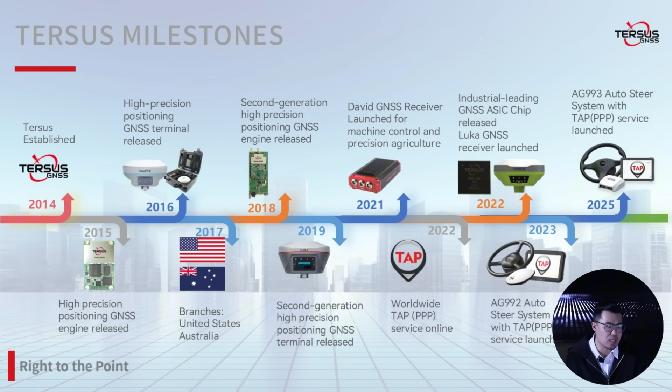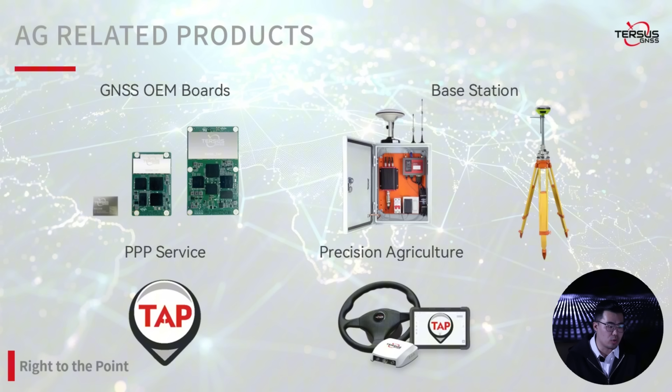Since Tersus was established, we have been focusing on GNSS boards, receivers, and navigation algorithms. This technology foundation is what makes long-term stable auto steering possible. And these are our products related to agriculture: our own GNSS board, base stations, and our PPP service TAP.

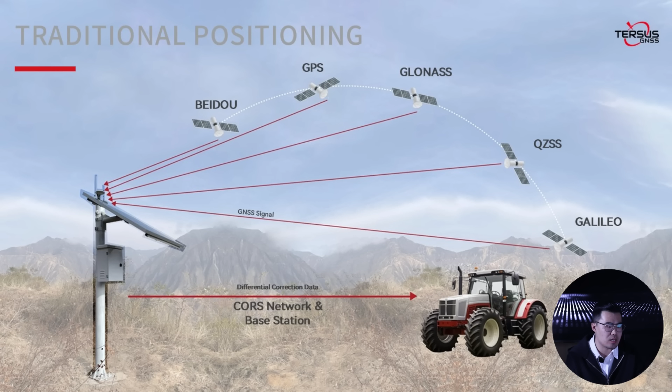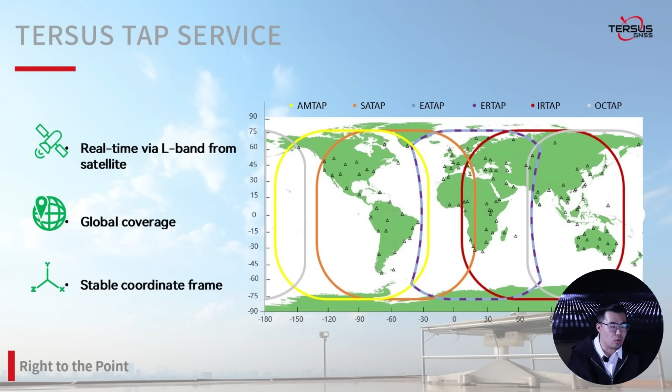Okay, the AG993 system is powered by the Tersus TAP, a global PPP correction service. Unlike the traditional RTK solution, the TAP doesn't require a local base station or complex configurations. It offers global coverage, fast convergence, and 24/7 availability, which makes deployment much simpler, especially for distributors operating in multiple regions.

Another important point is reliability. When RTK signals become unstable and unreliable, the system can seamlessly switch to the TAP mode as a backup, ensuring continuous operation in challenging environments. That is the TAP fill function.

Compared with the B2B of BDS and the HAS of Galileo, TAP has absolute advantages in coverage, convergence time, and accuracy. Now let's move on to the AG993 Auto Steering System itself.

AG993 adopts an integrated receiver design with built-in GNSS IMU module and network and radio modules. This means the system can directly connect to the L-band satellites and get the corrections from the satellite for the TAP service without extra devices.

Combined with the new generation display software, AG993 provides smooth and accurate steering control, reducing oversteer and unnecessary adjustments during the operation. Before we go into the hardware details, let's take a quick look at what is included in the AG993 package.

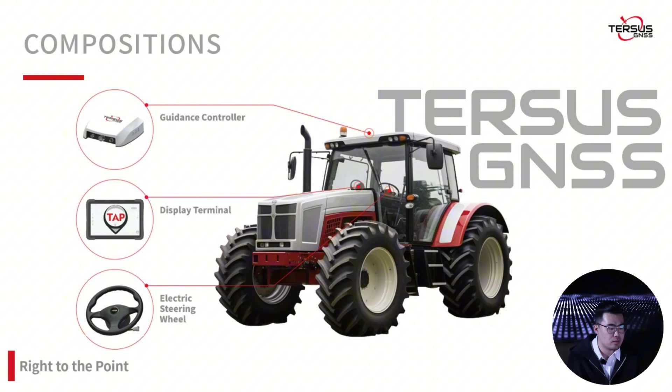As you can see, the system is delivered as a complete and well-integrated solution, which helps distributors deploy it quickly without any extra preparation. Okay, the AG993 system adopts an integrated hardware design including the guidance controller, display terminal, electric steering wheel, and some optional components.

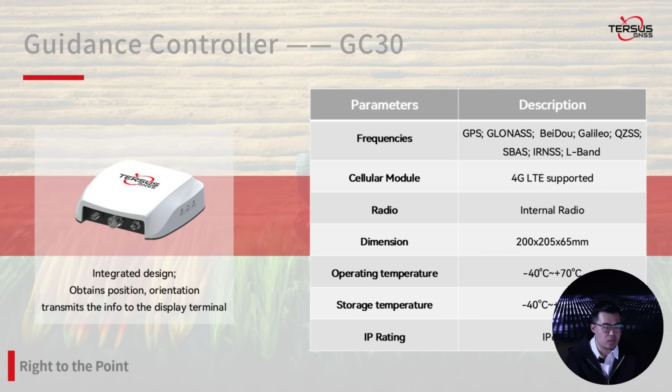Firstly, the guidance controller GC30 is an integrated design. It transmits the position and attitude of the vehicle to the software. With built-in 4G and radio modules, it gives more options for correction transmission.

Display terminal, the TC120, has a 10.1-inch screen and Android 11 system. We also have another 12-inch tablet which will be released soon to give customers more options.

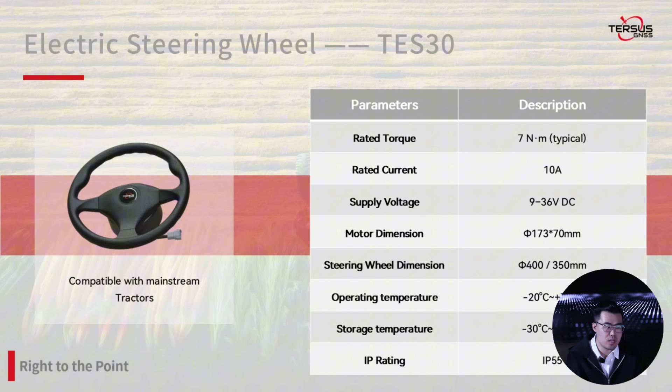The electric steering wheel, TES30. We provide 2 different steering wheels for customers, and all these components are designed for industrial-grade reliability with wide operating temperature range and high IP protection levels.

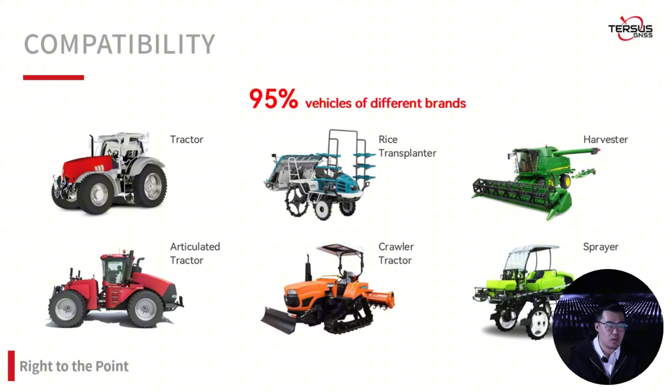It is connected to the display terminal by Wi-Fi, and can do functions like auto steering mode switch, left and right U-turn, and AB line creation. From a compatibility perspective, AG993 supports around 95% of vehicles from different brands for different working scenarios.

One of the most common questions for distributors and users is how complex the installation is. Let's take a brief look at the actual installation process. Please mount the guidance controller on the roof and on the central axis of the vehicle to ensure the horizontal offset is 0 as much as possible.

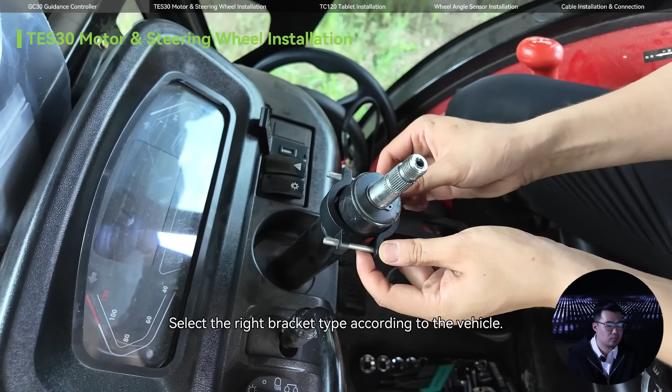Remove the original steering wheel. Install the motor bracket A on the tractor steering column. Select the right bracket type according to the vehicle. Install the spline at the bottom of the motor. Install the motor bracket A at the bottom of the motor.

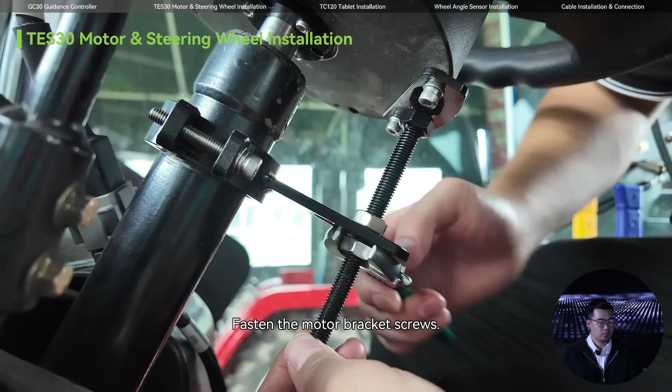Install the motor on the tractor steering column. Fasten the motor bracket screws. Install the steering wheel on the top of the motor.

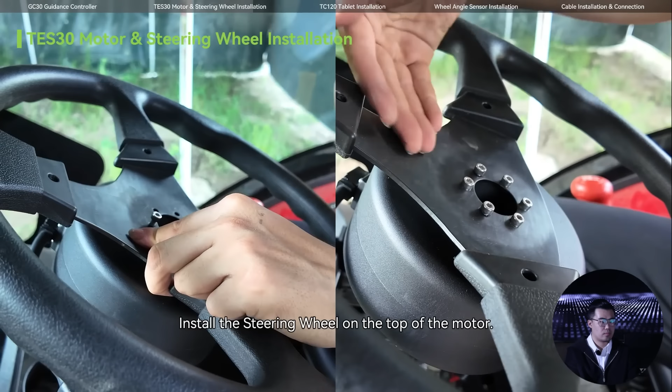Check that the motor installation is stable and will not shake. Then fasten the dust cover. Install the bracket and U-shaped screws to the door frame.

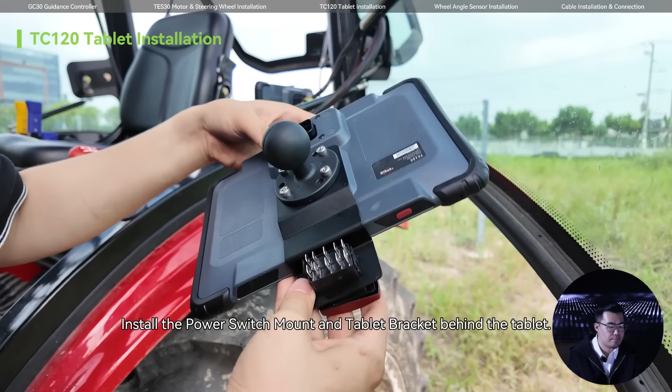Install the power switch mount and tablet bracket behind the tablet. Fix the tablet to the bracket.

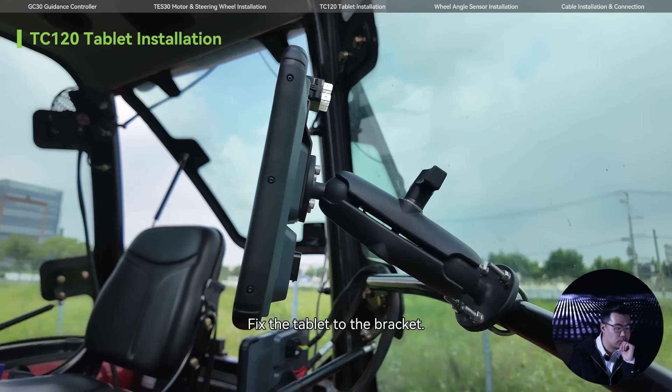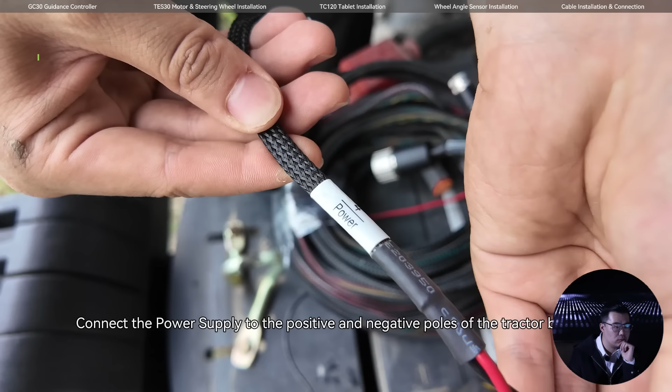Install the WAS. Ensure the plate rotates with the front wheel. Reserve about 10 centimeters of cable to prevent it from being torn off during vehicle turning. Connect the power supply to the positive and negative poles of the tractor battery.

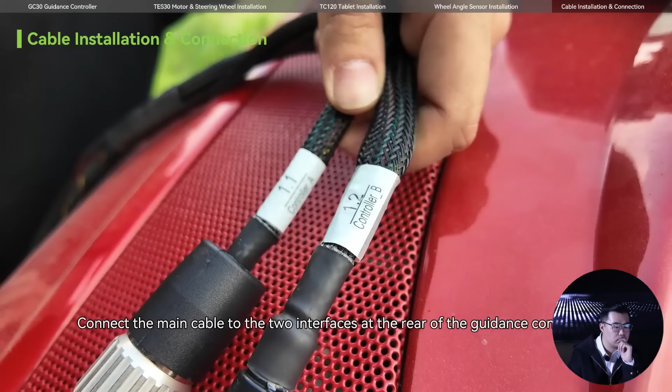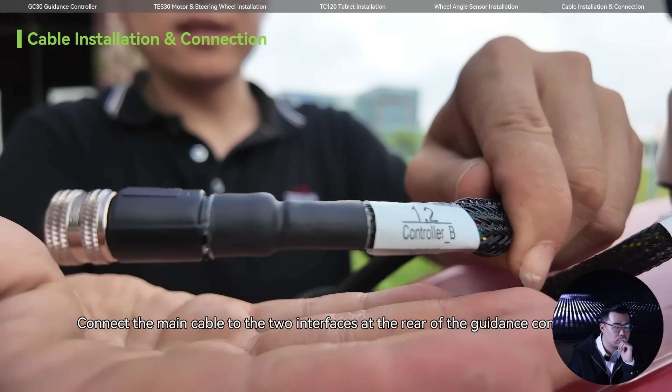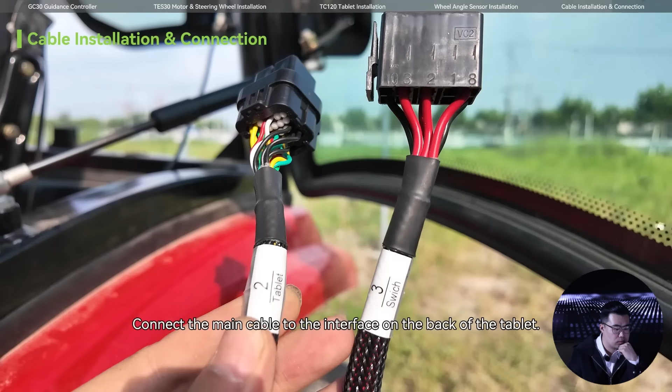Connect the main cable to the two interfaces at the rear of the guidance controller. Connect the main cable to the motor. Connect the main cable to the interface on the back of the tablet.

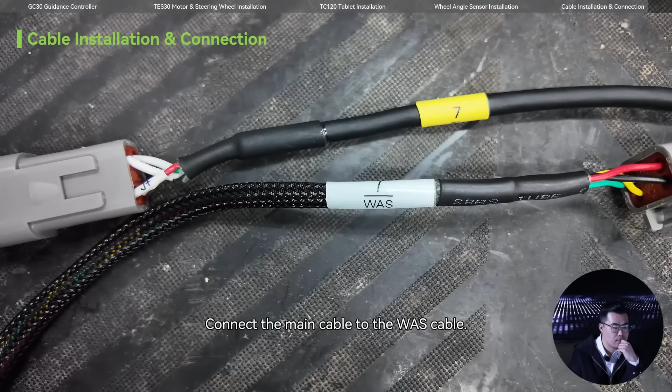Connect the main cable to the WAS cable. Turn on the power switch, then enjoy the auto steering. Okay, as shown in this video, installation does not require much vehicle modification. This makes AG993 very suitable for distributor-led installation and after-sales support.

AG993 supports all major farming operations including harrowing, sowing, spraying, and harvesting. So next is about the software.

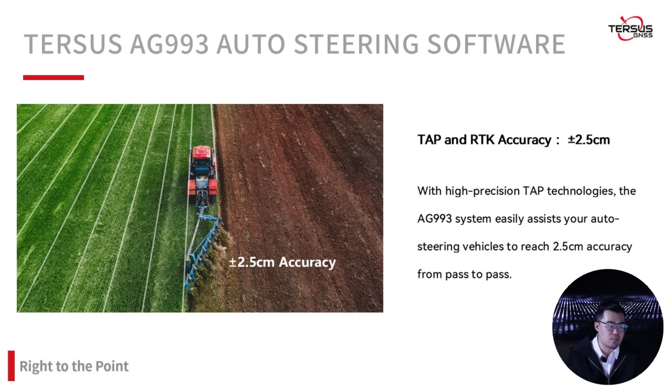With the TAP or RTK correction, the system can achieve 2.5 centimeters pass-to-pass accuracy, which helps reduce the overlap, minimize the missed areas, and improve overall efficiency. This level of accuracy is especially valuable in precision planting and controlled traffic farming.

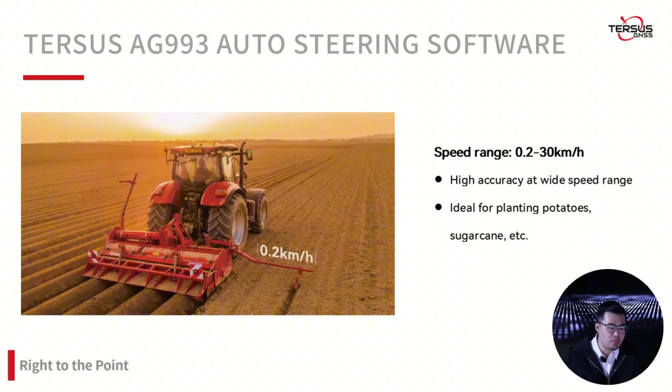AG993 always keeps the high accuracy at a wide speed range from 0.2 kilometers per hour to 30 kilometers per hour. And maintaining the accuracy at very low speed is a real challenge in auto steering. But for example, for planting potatoes, it's quite necessary. So now let's see how the AG993 performs under ultra slow speed operation.

So this demonstrates the stable steering control even at an extremely low speed, which is critical for operations such as transplanting and precision planting.

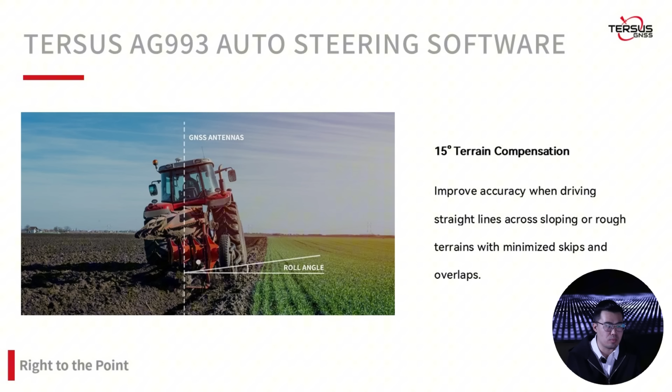Another common challenge is maintaining a straight line on sloping or uneven terrain. But with our powerful navigation and control algorithm, it's not a big problem for AG993. So now let's check out how AG993 handles this kind of scenario.

With terrain compensation, AG993 minimizes skips and overlaps even under difficult terrain conditions. Now let's briefly look at the key software functions of the AG993 system.

This system supports multiple guidance line types, flexible boundary creation, field management, data sharing, auto U-turn, and smart path planning. These functions are designed to reduce the operator's workload while maintaining consistent operating quality.

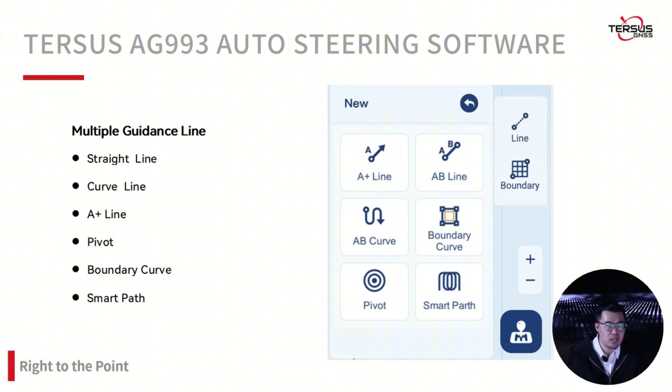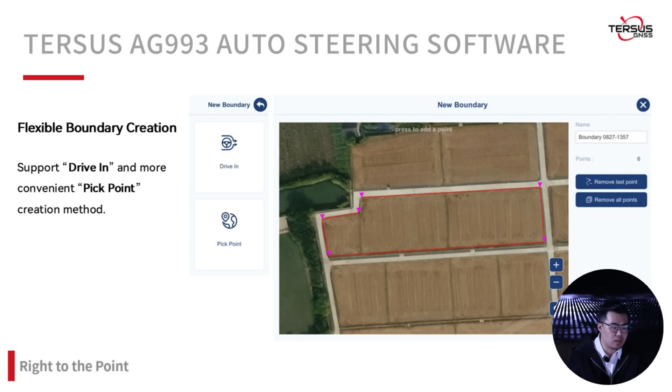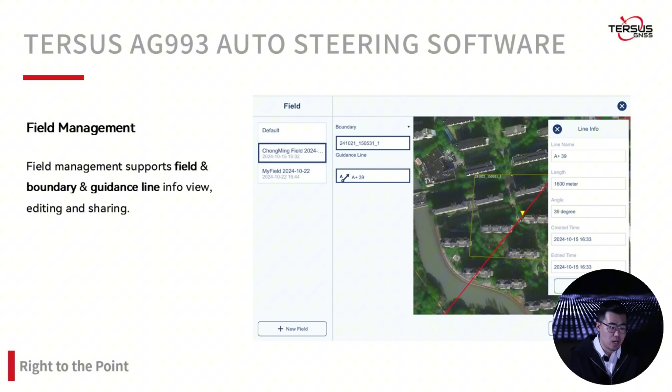The field management helps keep data consistent across multiple machines. You can share the boundary and guidance lines with another user, and they can use your created guidance lines and boundaries, and you can work together.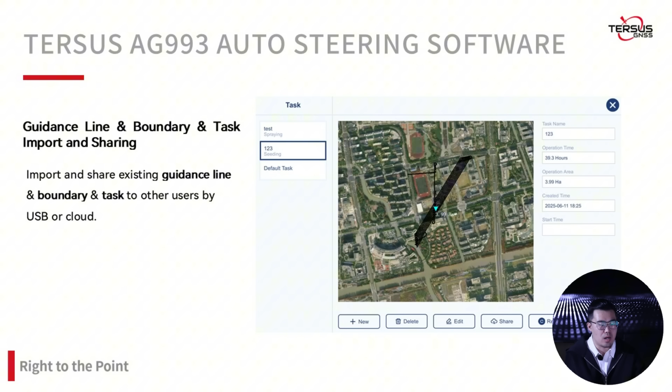Okay, next, the easy data sharing enables efficiency between multiple tractors. With this function, like task sharing, different users can collaborate on the same task, and they can see their working areas, like the working path, on the display in real time.

And the auto U-turn reduces the operator workload and improves headland efficiency. With this function, you don't even need route planning; you just need a boundary, then you can complete the automatic U-turn when reaching the boundary line, like the headland.

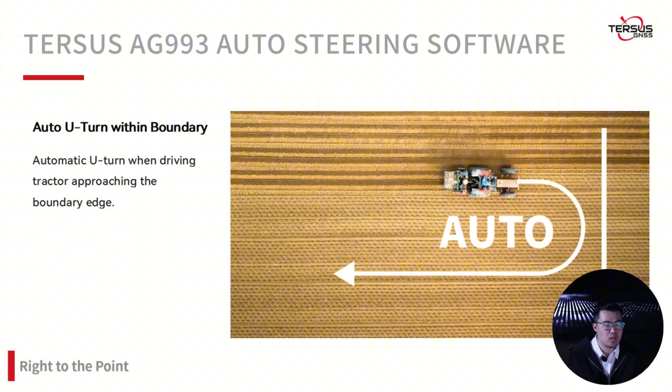For the retrofit market, it provides a cost-effective upgrade for vehicles without original navigation systems. For factory installation, AG993 can be integrated into any new agricultural machinery.

And for OEM partners, we offer open and flexible integration solutions, including customized hardware and software. This flexibility allows distributors to target both existing fleets and new equipment markets.

Okay, to summarize, the AG993 Auto Steering System offers reliable centimeter-level accuracy, flexible installation, proven real-field performance, and clear market positioning. It's a practical and scalable solution for both end users and business partners.